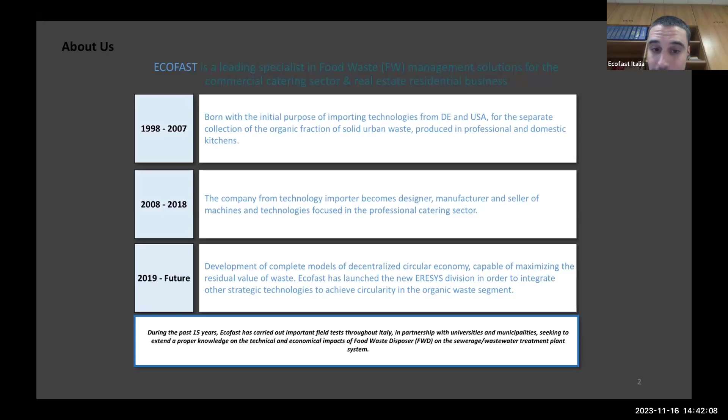The enterprise has more than 20 years of experience in this sector, and since 2008 we also started to design and manufacture new machines, especially for the professional kitchen sector. Over the years, we developed international partnerships, but also distribution networks.

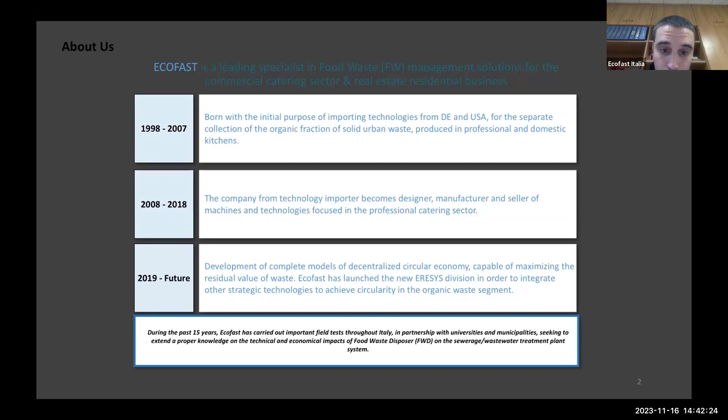Okay, but what do we do at Ecofast? To start, food waste management is known to be difficult, and is still very expensive if we consider that food waste accounts for 40% of the total waste generated. So it's easy to imagine the environmental and economic impact of, for example, transportation.

Then, from our personal experience, even in the most advanced European countries, where the separate collection system has been in force for 30 years, the improper materials, so plastic and metals, often reach between 15 and up to 20% of the total. The reasons are multiple, for example, people's education or lack of comprehension. But for sure, there is a value chain gap due to the net separation between who is producing the waste and the final user or the transformer.

So our machine processes waste following two mechanical principles: grinding and dewatering. The grinding process differs from the most common one that you can find in the market, because it doesn't involve any rotating blade, but is performed through centrifugal force. Imagine the food waste falls onto a rotating plate, which pushes the material against a fixed ring that has an abrasive function.

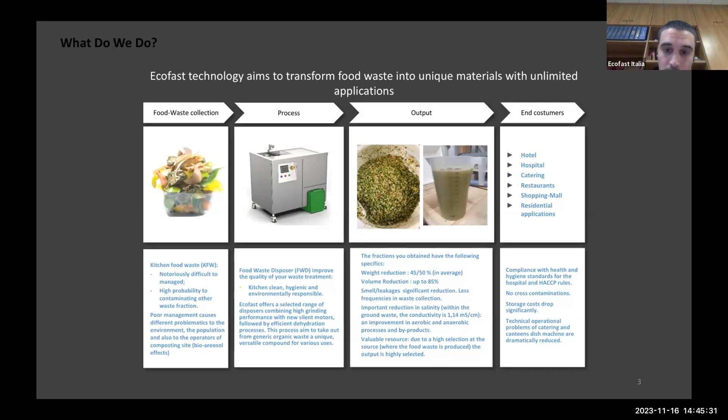Okay, so in these images, you can see the Ecofast unit, the one that performs grinding and dewatering under the same cabinet. But we also offer our customers the possibility to perform the grinding in the kitchen, for example, and through a pipe system, the dewatering process is performed in another room. In this case, the water input is important because water acts as a vector to bring the ground food waste from one place to another.

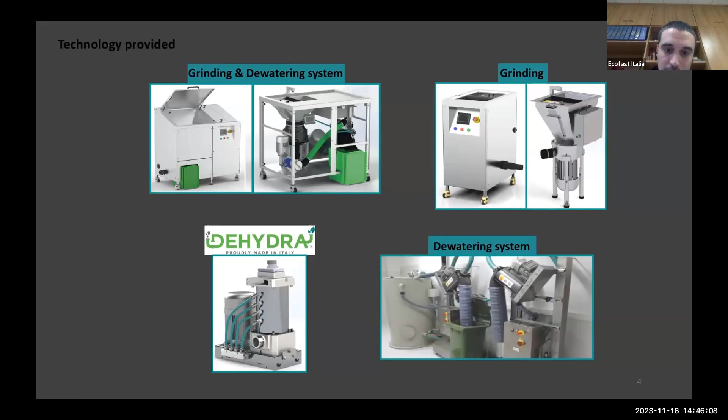Okay, so after introducing Ecofast equipment and its main characteristics, I can finally start to speak about Eresys and the idea of developing a robust micro-decentralized circular economy. Since I became operational in the company, a new young team is trying to promote this concept of decentralization. Our idea is that due to the strategic placing of Ecofast technology, located at the source where the waste is generated, integrated valorization projects of selected and therefore high quality organic waste can be triggered.

At the moment, the main valorization lines that we are promoting are the composting of the solid fraction, but also the pyrogasification, which now I'm going to show you, that is performed through a small cogenerator. But this only after drying and pelletizing the ground food waste. Then we are also studying and promoting, through a collaboration with the Spanish Research Institute, the bioelectrochemical filtration of the water coming out from the different processes. And all these experiences have been tested and developed thanks to the support of this technological partner.

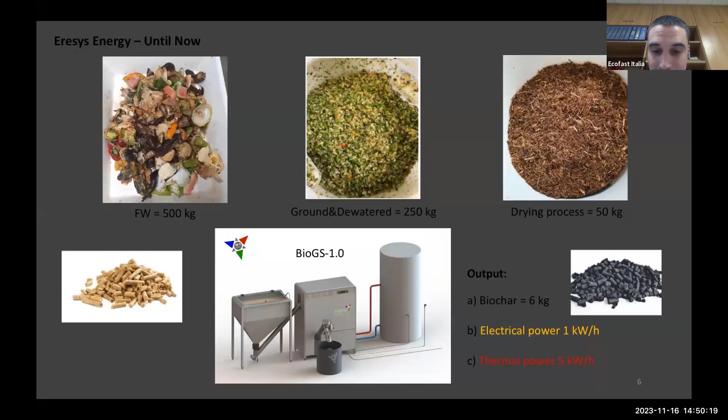And if we consider a consumption of 2 kilos of pellets per hour, the outputs after a working day of this process are, as you can see, 6 kilos of biochar, 1 kilowatt hour of electrical energy, and 5 to 6 kilowatt hours of thermal energy. For us, it means 500 liters of water at 65 degrees. And later you will understand why I'm saying this.

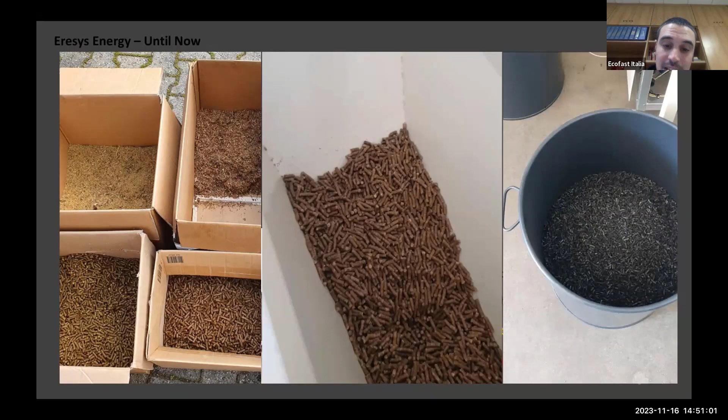So during our experience, we produced pellets of 2 different types. One was a mixture of food waste, and one was coming from a monomaterial, platano peels. The drying process was performed using a standard commercial electric dryer that, due to its small dimensions, was a bit of a bottleneck for the experiment. In fact, the pellet that you can see here was composed of 50% dry food waste and 50% sawdust. This was in order to reach the right amount of pellets in a short amount of time and perform tests with the cogenerator long enough to achieve interesting and trustworthy results that now I'm going to show you.

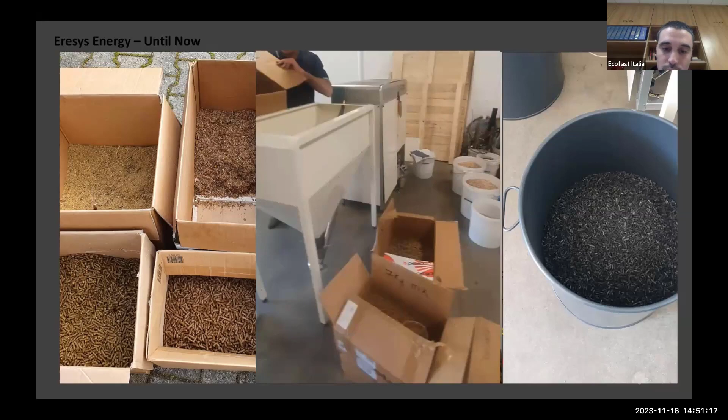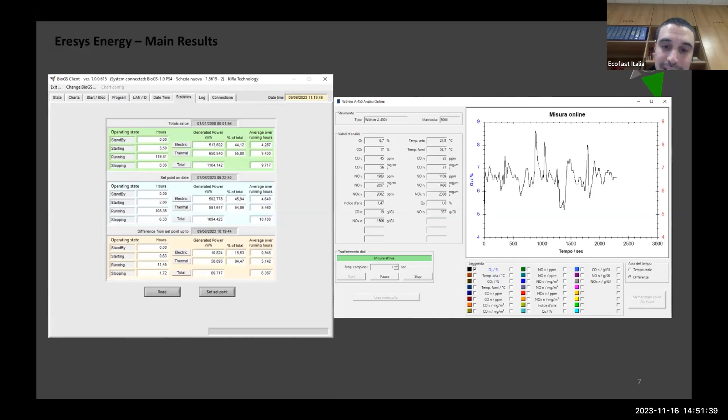Before, I want to show you that the company Kira implements AI automation and an incredible remote control that allows them to have predictive diagnosis and therefore reduce the maintenance. So in this table, you can see the performance that we achieved, compared with the performance achieved with the system using standard wood pellets, shown in the green table. As you can see, in both cases, with the organic waste pellets and the platano, the efficiency in energy production is similar to the standard pellets.

The main difference was regarding the emission levels, because we registered high levels of CO and NOx compared to the wood pellets. And even if they told us that the levels are very low, I have to say that at the beginning this aspect worried me a bit. But consider that in their unit, they don't even consider a scrubber due to the very low emissions. I thought that, okay, we can study the way to control this aspect better.

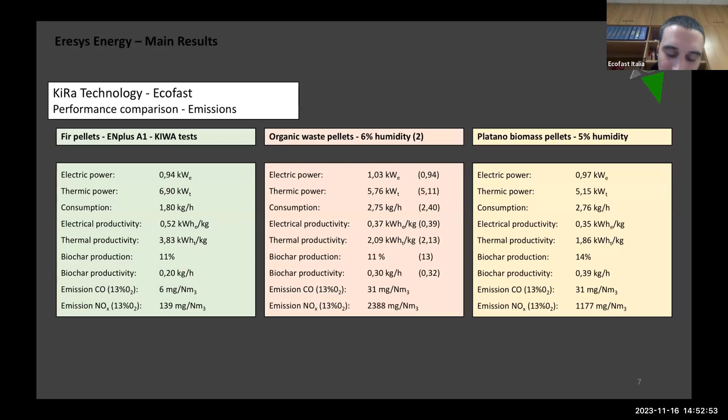Okay. So in the last two slides, I want to speak about our future perspective. At the moment, one of the most interesting markets that we are facing is the Maldives, and the resorts located in these different atolls. Before 2021, the resorts, which were producing mountains of food waste daily, were allowed to discharge the organic material directly into the ocean. But due to a new legislation, this practice, fortunately, is not allowed anymore, and therefore everybody is desperate to find a solution.

So our idea is to design what we call eco gazebo with the Eresys energy solution, which we consider the best option for the Maldives, because compared, for example, to composting, the lack of space can be a problem. And if we also consider energy, energy is such an important resource there, because they burn oil to generate it. We are designing a dryer that is fully connected to the cogenerator in order to perform the process of drying the food waste using the thermal energy that the system produces.

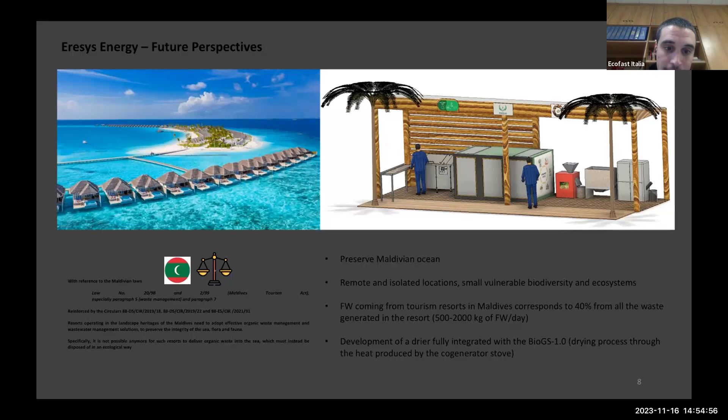And from our first results and calculations, we think that we are able to reach autonomy in the process from the energy point of view. But we are still working on it.

So, in order to conclude, and considering that fresh water is such an important resource, especially in the Maldives, I would like to give you some insights about a project in which I believe a lot. This project was supported especially by IMDEA Agua, a research institute in Spain, and METfilter, the spin-off of the institute that designs and commercializes bioelectrochemical filtration systems. In our case, the organic-rich water coming out from the Ecofast dewatering process is pumped into a septic tank that acts like a reservoir.

Then the nature-based solution known as METland acts as a natural biofilter. Here the organic soluble fraction present in the liquid is biologically oxidized by an electroactive microorganism population, which is able to interact through its metabolism with the conductive material, for example, biochar. But apart from the filtration purpose, the idea is also to recover the inorganic fraction in the form of a new nutrient solution, which can be exploited for the growth of photosynthetic organisms, for example in hydroponic or vertical systems, or also through fertigation for gardens.